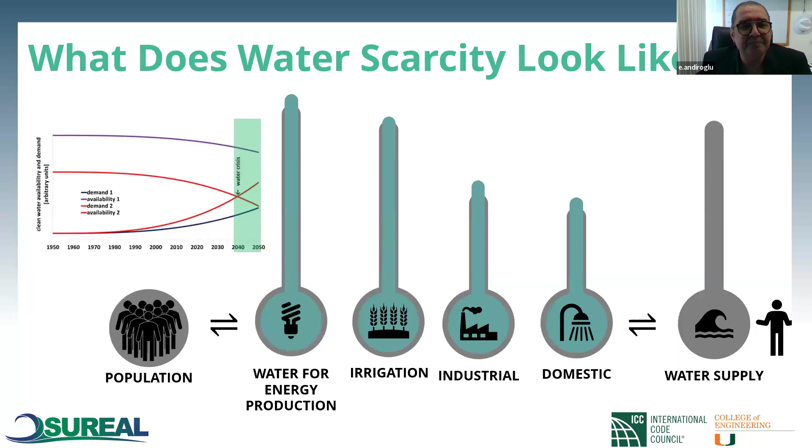It's also important to highlight that water is a resource we often take for granted, but a very small percentage of total water on Earth is actually readily accessible and usable by us. The three primary categories - agricultural at 70%, industrial at 22%, and residential premise plumbing systems at around 8% - make up most of that demand. But all of that comes out of about 2.5% of total water on Earth that is fresh water. The remaining 97.5% is salt water.

Out of that 2.5%, the bulk is really embodied within frozen icebergs. So the readily available water for us on the surface is right around 0.3 to 0.5% of the total available water supply. Readily accessible meaning, yes, we have earth layers and water tables, but that requires energy and additional resources for direct access. So how well we manage and how efficiently we utilize water that is readily available is really significant. Let's move on to the next.

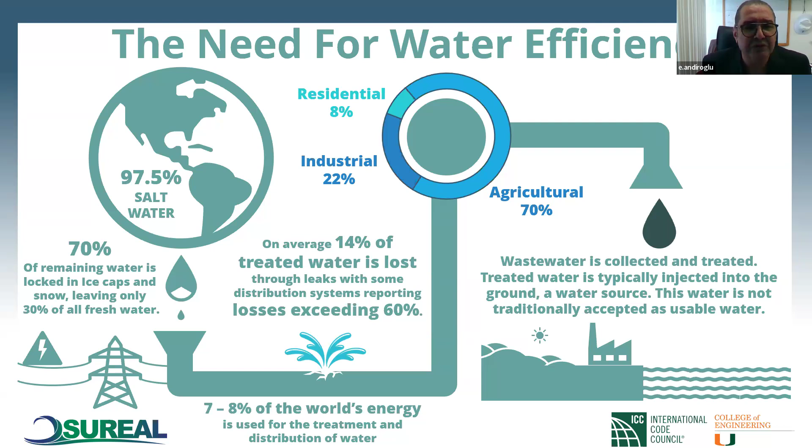With all that said, hopefully we all recognize that we must arrive at certain strategies that help reduce our water consumption and better utilize this precious resource. To better describe this intent, we can think of it as two categories.

On one side, end use reductions, where you can improve efficiency. You can bring on regulatory guidelines that help guide end users, and better education and awareness of this management need and practices. On the other side, water reuse - having access to that very small percentage of readily available water. How can we better manage that water? What are the reuse practices?

This speaks to three general categories. Starting from the bottom: protecting water resources from a water quality standpoint. The more protection we implement, the less environmental pollution we introduce, the more readily available these water resources become for reuse, because they reduce the treatment burden, which has significant cost implications. On-site wastewater treatment technologies and management standards, which you're going to hear a lot more about from my team in a little bit, are certainly key in helping that shape up.

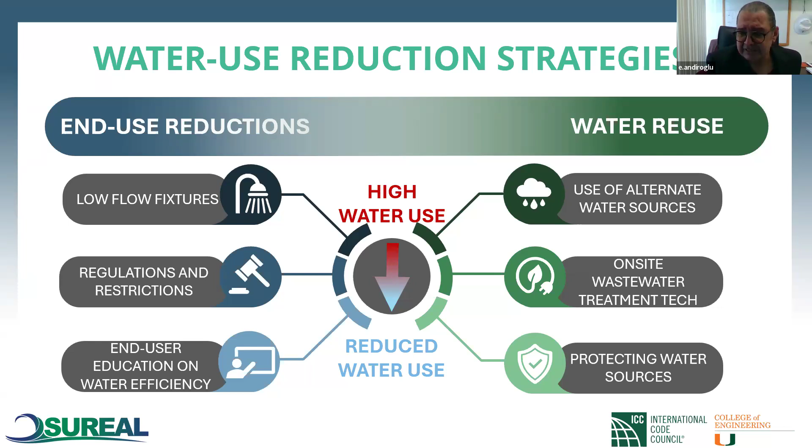So with that, I'm going to turn over the discussion to my team member, Kyrah Williams, who's going to exemplify some of the provisions that can be integrated to help operationalize or visualize the benefits and pathways that can come from these, whether it's end use reductions or water reuse practices. How can we operationalize them? So Kyrah, go ahead. Thank you, Professor Andiroglu.

So by understanding the various pathways, the mission to create a standardized approach that could be applicable to all cities was created by the International Code Council, the ICC, through development of the 2021 International Water Conservation Code provisions, which I'll continuously refer to as the IWCCP.

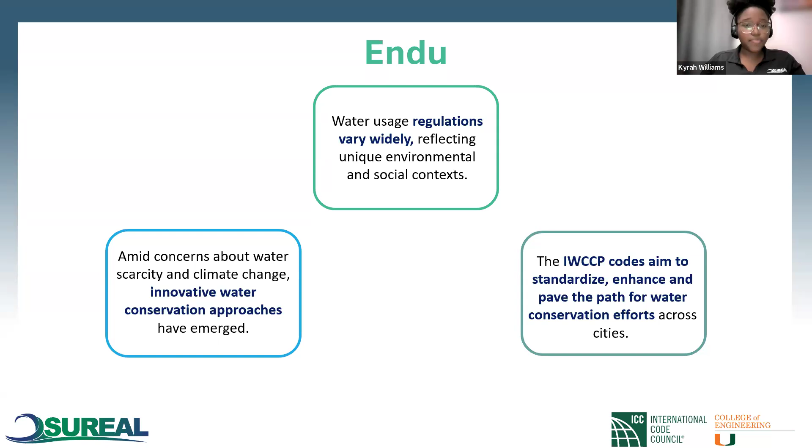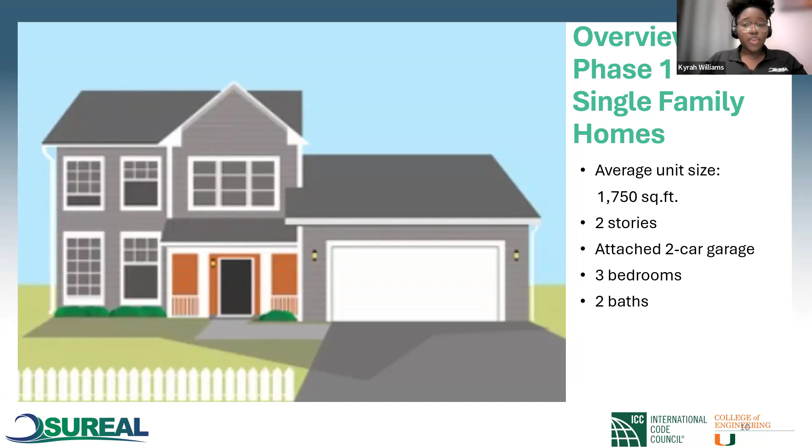In Phase 1, we decided to focus on single family homes. We obtained the average unit size, number of bedrooms, and average square feet. For Phase 2A, we focused on multifamily. Being that multifamily construction is very vast in nature, we broke it up into different building types: garden style low-rise, mid-rise, and high-rise properties, obtaining an average dwelling unit size of 875 square feet and what the typical bedroom and bathroom would look like.

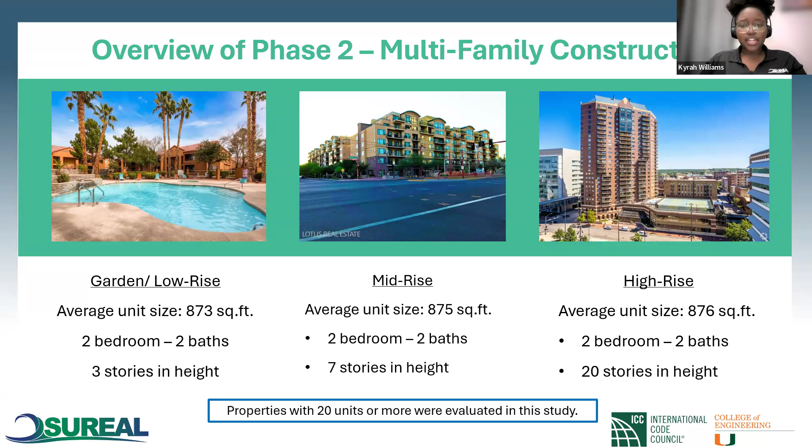Moving forward, in order to assess the outcomes of end-use reductions as well as water reuse, we decided to focus on the IWCCP's measures and how they could be implemented. The measures listed are: water efficient fixtures and appliances, gray water systems, rainwater harvesting, HVAC condensation recovery, hot water systems and piping, alternative water resources, plumbing system design, and landscape irrigation efficiency. But for our research, we decided to focus on the low-hanging fruit, which are the 4 circled in blue.

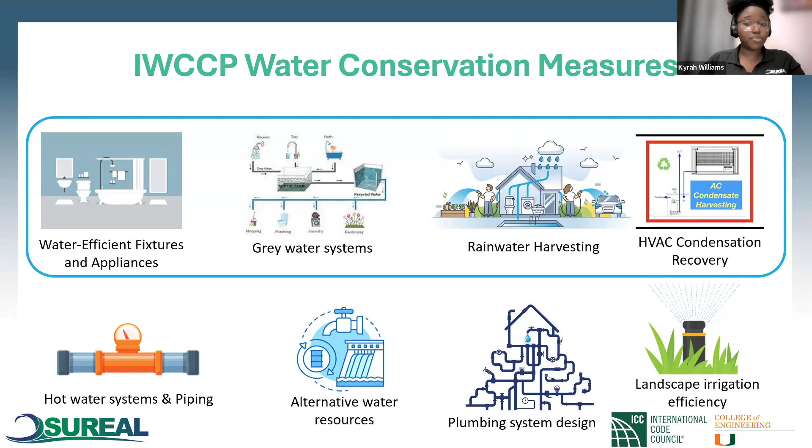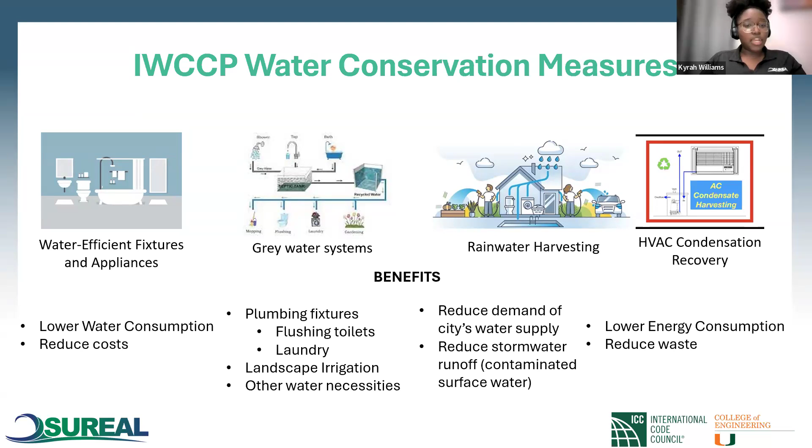As a result, we decided to focus on the benefits these 4 measures can give us, which is lower water consumption, but also lower energy consumption. We also looked at the multiple uses that can come from implementing these measures, such as for a consumer's everyday life like laundry, gardening, washing your car, but also from the city standpoint of reducing water demand and limiting stormwater runoff.

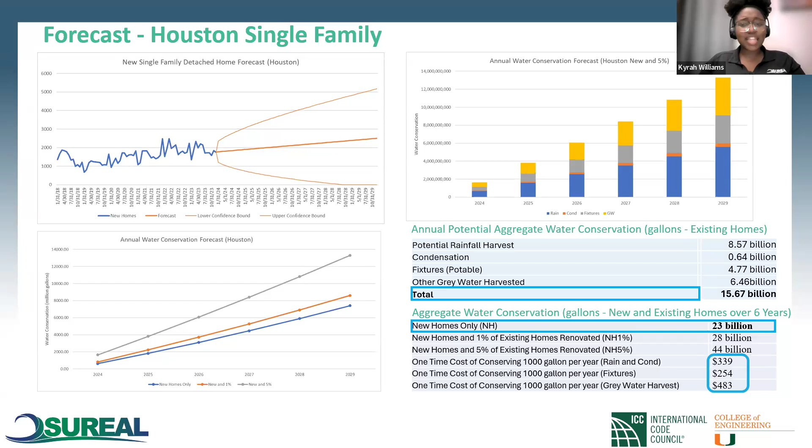So after applying the same framework, we also apply this to multifamily construction. If you can flip back to the first slide and back to this one again, you'll be able to see the comparison of data on the implementation of fixtures versus single family or multifamily. You can already see a difference just based on building typology. For instance, for a garden style home in Houston, for existing homes, 21.1 billion gallons can be conserved.

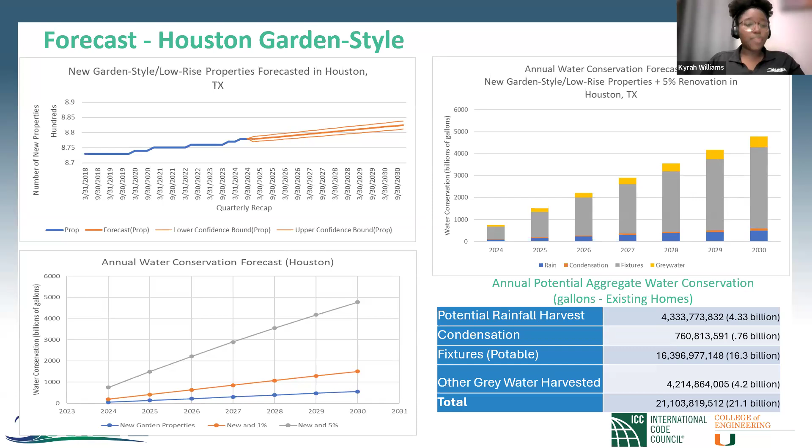Our overall takeaway was that there's not a one size fits all approach. It's actually very vast, where different measures cannot work for every building typology. So if we're looking at garden, mid-rise, and high-rise, you can see on the screen the range from 559 billion gallons to 14 billion gallons. Even though you may implement these measures, they may not all fit.

But for the city of Houston, 698 billion gallons are projected to be the approximate total potential aggregate for water conservation for multifamily construction. Next slide, please.

So comparing the data between phase 1 and phase 2, at the top you see new multifamily construction, and at the bottom you'll see new homes. Using your deductive reasoning, you're able to see that the implementation of water efficient fixtures is super paramount, regardless of the city.

Specifically, if we're looking at Las Vegas, for instance, it definitely helps and aids in conserving water. Versus if you're looking at Des Moines or Houston, when you're looking at rainwater, it is not the same. When you're looking at multifamily construction, it may not be of a big benefit, but it does help compared to single family, where it's a tremendous benefit that is actually very helpful and something you should implement. Whereas if you look at Phoenix, which is the last column, rainwater may not be of major assistance, and there may need to be more focus on implementation of water efficient fixtures and gray water harvesting.

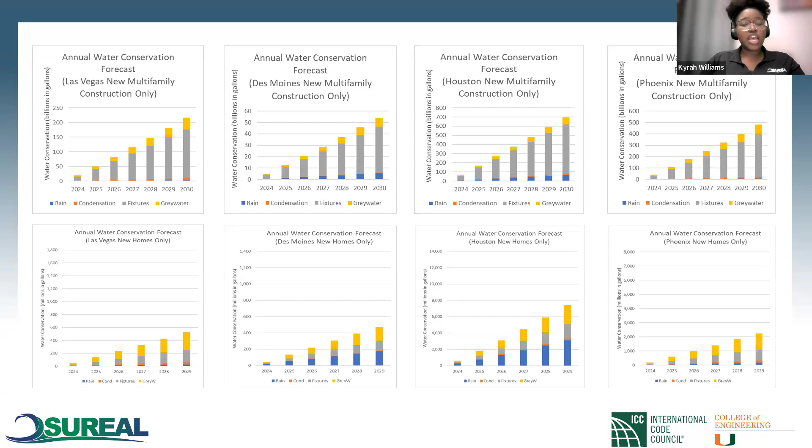Next slide, please. So to do a quick deep dive into the analysis of potable versus non-potable water, the graph on the left shows how much water is consumed in blue, and in green, the implementation of water efficient fixtures. As you can tell, even with the implementation of water efficient fixtures, that doesn't meet the potable demand.

However, if we look at the non-potable graph to the right, you have consumption in the bright teal, and then you have rainwater and gray water harvesting, which are respective to each other within the graphs. If you're using non-potable demand for rainwater and gray water for each of the cities, it may or may not actually meet the non-potable demand.

For instance, Houston, since that's what we're focusing on today, the implementation of rainwater harvesting and gray water harvesting can meet the non-potable demand. And if you were to use the rainwater, gray water, and water efficient fixtures together in order to meet the total water consumption, it will meet the total demand.

Whereas if you're looking at Las Vegas, rainwater and gray water harvesting may not meet the full non-potable demand, but with the help of water efficient fixtures, it'll be able to meet the total water consumption needs for that specific city. So with that being said, if we were to combine these measures, ultimately the goal is to find out where the synergy is and where there's a certain level of combination of approach to water conservation that can ultimately be beneficial for all.

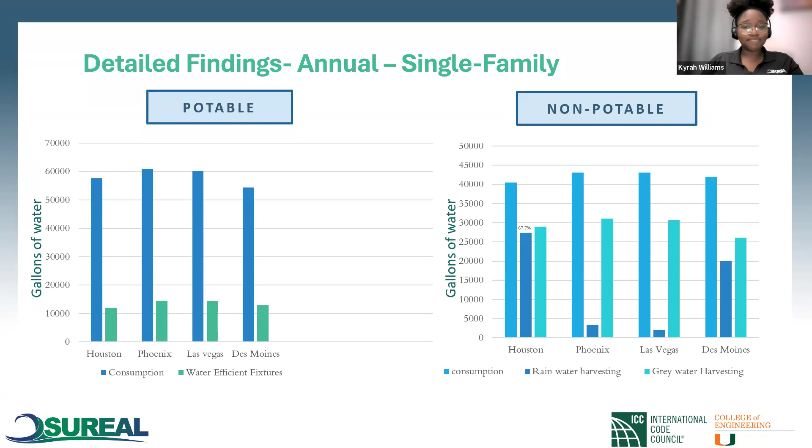And yeah, so what Kyrah was talking about earlier is really great, right? It talks about what could be, right? And that's very important. But in order to get there, we've got a long way to go. And that's kind of where the research that we're doing comes in with the SUREAL Laboratory. So I want you guys to take a moment and look at this graph right here.

So we're looking at the overall water supply, essentially called withdrawals by use category. If you look closely at the bottom graph, you'll see a little purple bar. My research primarily focuses on that purple bar, which is public supply.

That means every day we use water for showering, consuming, cooking, irrigation. But notice that with the introduction of water efficient practices, such as the EPA Act, which is intended to reduce water consumption in residential buildings, we've noticed this purple bar, which used to be growing at a linear rate, has started to slow in growth or stop.

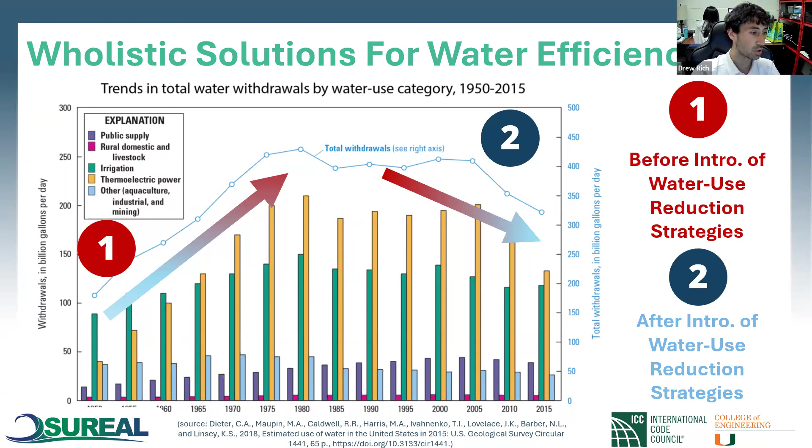So why does that matter? When we look at this, we have to consider premise plumbing systems. These are our buildings, the portion of the building that delivers potable water to the end user. Whenever we take a shower, our potable water systems are supplying that water. Whenever you cook pasta, whatever you want to do in your home, we have a supply system delivering that water.

Now how does this connect to water efficient practices? Why is this a challenge? What does this even mean? Well, when we design our systems, we design them in a tree-like manner. And if we suddenly reduce the amount of water in the system, but don't change the overall design, like the sizing of these systems, we have an issue.

We have something leading to what's called stagnation, where the water in the pipe stays there for long periods of time. I'll talk about it a little bit, but in order to understand this, we're going to talk about supply system design.

First, they are formed in a tree-like structure. In A, we have that tree-like structure, a distribution system. We have one main distribution line that feeds all of the rest of the apartments or units or single-family homes. For example in point B, we distribute water from the main supply, and then subsequent points distribute that water to the units or single-family homes.

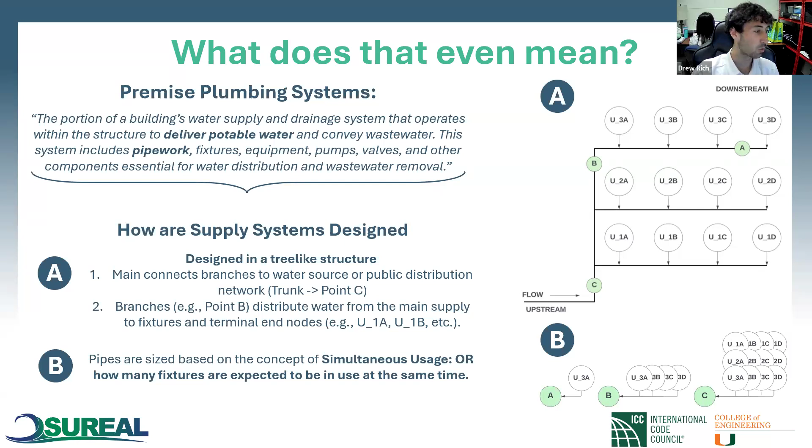Now when we get into that, we run into some problems. When designing a system, we know there's a range of flows that the pipe can experience. For example, not all of your fixtures are on at the same time throughout the day. So we have to select an appropriate design flow rate. There's likely ranges that the pipe can access.

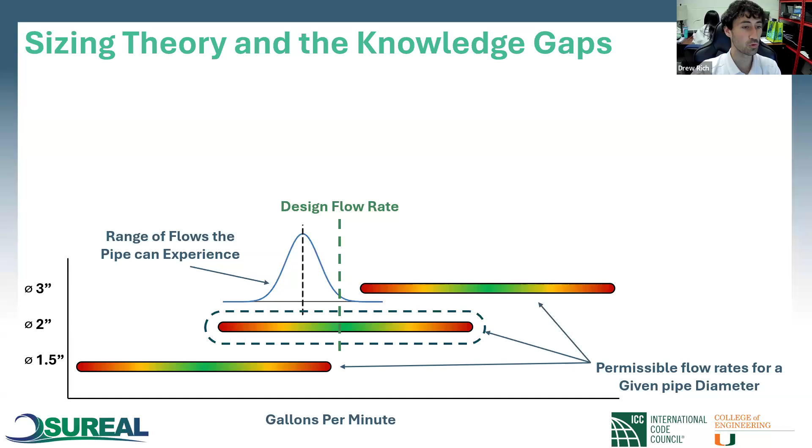For example, for a pipe that has all of the fixtures like a shower, a water closet, a lavatory, there's an expected amount of flow going through that, and we have to size to that design. So what happens if we end up undersizing, or pick a design flow rate that's much less than we expect it to be? Well, we have some significant issues.

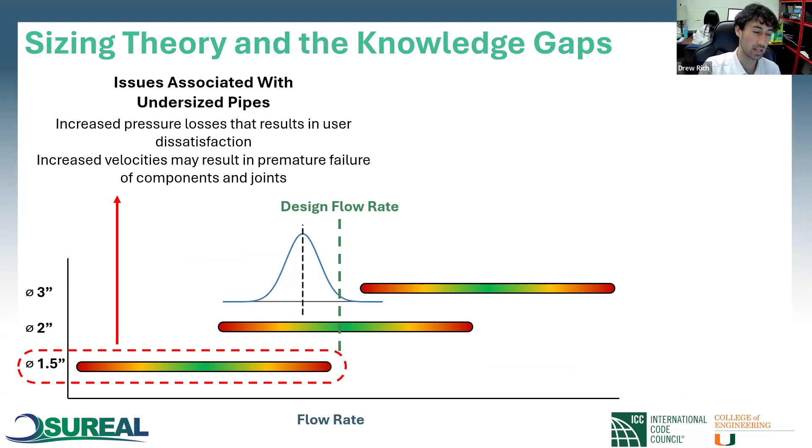First of all, we have increased pressure losses that result in user dissatisfaction. We have increased velocities that may result in premature failure of components. So we don't want to undersize it because that would lead to some pretty bad things. But what happens on the other side? What happens if we oversize these systems?

Well, we start to see that there's an increased capital cost, right? If you're using a 3-inch pipe versus a 2-inch pipe, that costs more. We see health risks from opportunistic pathogens, things like Legionella. So if the water is sitting in that pipe too long, it can develop a lot of pathogens that can actually negatively impact the end user.

We have inefficient energy use from pumps. So if we expect to pump 100 gallons of water and we're only pumping 20, we've now picked a pump that's way too big for the distribution system. And then we also have excess water stored, which is increasing the amount of water that you have to treat and maintain, which also increases cost.

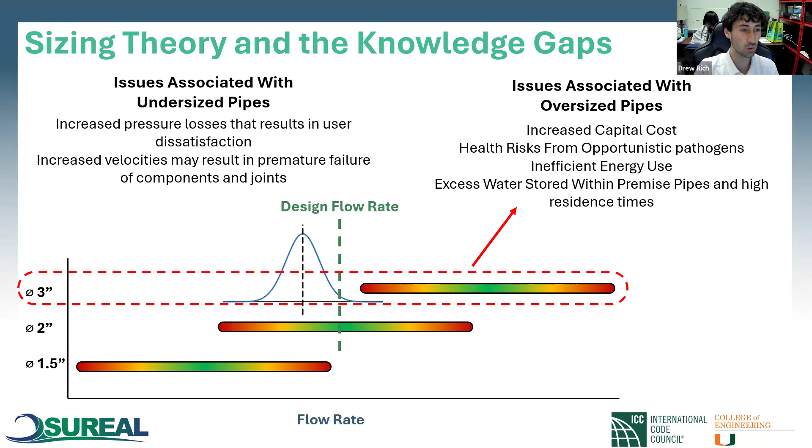So it's very important to select that kind of middle ground and get the design flow rate for these systems correct. So that's the why.

What is the gap? We see since the 1980s that there's been significant reductions in the way we use water. The only problem is we haven't changed the design framework. So Kyra talked a lot about efficient water use practices. That's great, that's fantastic. But what's happened is we haven't changed the way we size our systems.

So we have significantly oversized pipes, sometimes even 100% oversized. This can lead to some of the problems that I was discussing in the previous slide, and we really, really want to avoid that.

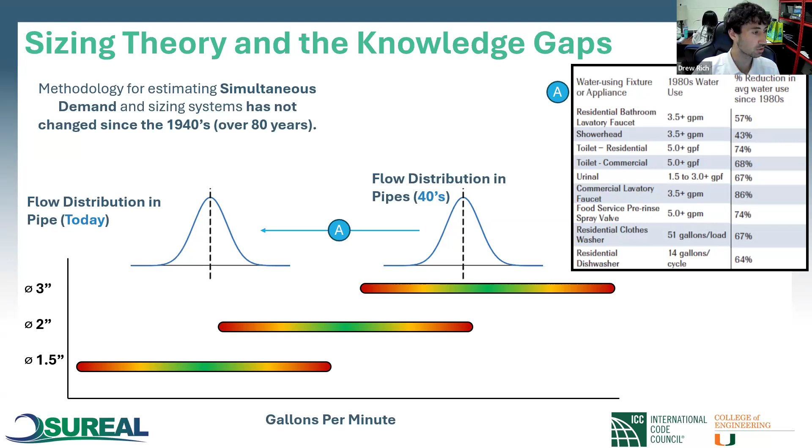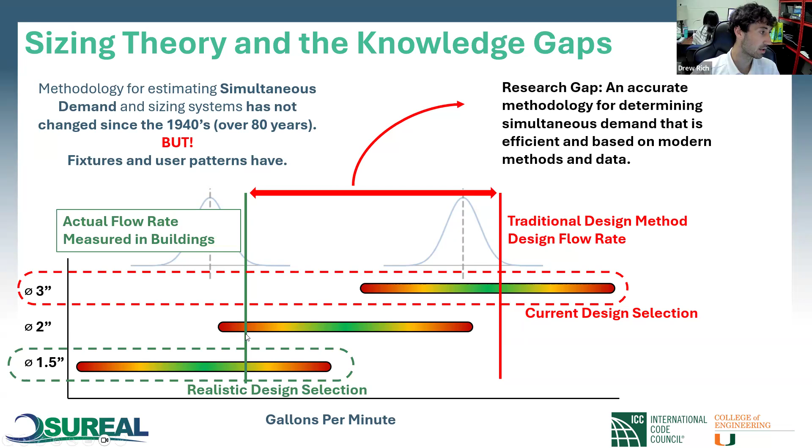So what are the solutions? Right now, there's a major research gap. This is the problem. This is a little bit of a complex slide, but what we're seeing is that there's a gap in the research. We need to be able to accurately understand or create a methodology that can predict the appropriate amount of water flowing through a pipe so that we can then size the pipes appropriately and avoid all of these negative consequences. So we see here where the red line is pointed up, and you can see it right here, that we have the current design selection where the actual flow rate is significantly decreased. So we're trying to avoid that.

So what is our solution? We want to make something that first is resilient. So we wanted a global product. We wanted to make this a living document so that we didn't end up in a situation where we needed to do this exact same process in 10, 20, 30 years.

As Kyra said, we're always implementing new strategies to try and save water. If we create a system that's not updatable, we're going to end up in a situation where we have to go back and do this process all again. On top of that, we wanted a simplified design approach. Engineers are ultimately going to be the people using these systems, so we need to make sure this is simple enough and efficient that they can use it without getting turned off from it being too complicated.

In terms of public health and safety, we want to make sure that this is meeting the needs of the building environment, making sure we're not having any pathogens in our system. So really making sure we accurately size those pipes.

And then we want to make sure that this system is modular and adjustable. Like Kyra had said, based on different cities, there's different requirements for water saving practices—some places are more water efficient than others. So we want to make sure that this product or idea is modular and adjustable, that it can adapt to the location of where we're trying to design the system. And in essence, that is the goal of the ICC 815 committee, who's tasked with developing this standard.

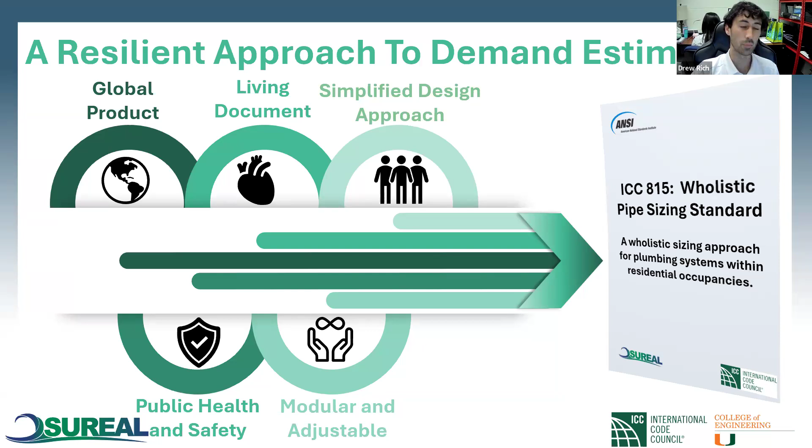Now, what we've ended up developing is a new pipe sizing approach through our research that allows for all of this to occur. We've developed a pipe sizing system that uses a network, or a series of lines and nodes, that can automatically provide a simple design approach for the entire building.

Now, what does that mean? Why is this important? Because again, all these fancy graphs, these fancy distributions, they're great, but what is the actual benefit of having these? So if we look down below, we can start to see that this provides a simple design approach—very simple, very easy to use.

This is a self-improving algorithm. It allows us to automatically update as soon as we get new information and data about water consumption patterns. This adapts to communities around the world. If we take data from the US, we can make a system for the US. If we take data from the UK, we can make a system for the UK. We can do this as long as we have the appropriate data dictating how water is used.

On top of this, it saves a lot—it saves time, it saves money, it saves materials, it saves energy. It allows us to more accurately design our systems and reduce waste that we really don't need to have. So when we look at these efficient practices, we want to make sure we make solutions that can adapt to the changes we're making to combat water scarcity. So from an efficiency standpoint, that's one of the solutions we produced.

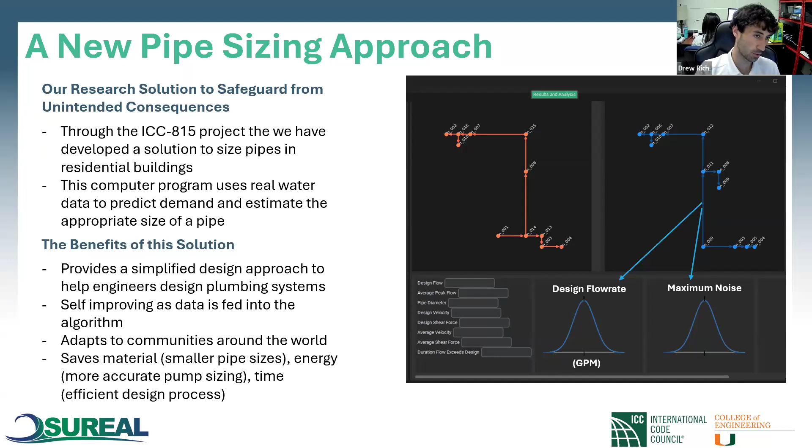Moving on to the next, water reuse—I briefly want to go over it. I know Kyra kind of covered it, but I think it's important to retouch on this. So what is water reuse and what are some of the streams? As Kyra mentioned earlier, we have streams called black water reuse, industrial reuse, rainwater and atmospheric condensate, gray water—and each one of these has a different water quality.

So when we talk about reuse, this can be a challenge. We can't treat gray water—water from sinks, dishwash, laundry, showers—the same as we treat our toilet water. It doesn't make sense. Those are very different types of water, so they require different water treatment levels, and that's a challenge.

That's one of the things standing in the way of implementing something like Kyra's suggestion. On top of that, there's a lot of different uses. We don't necessarily need to treat the water we're irrigating with to the same level we need to treat the water we're drinking.

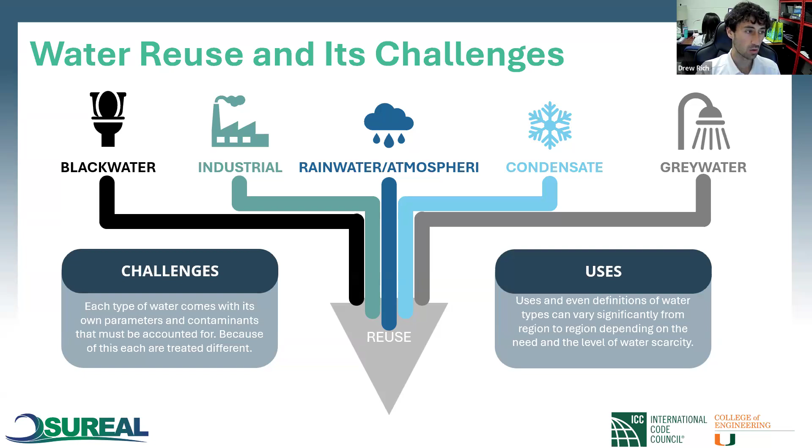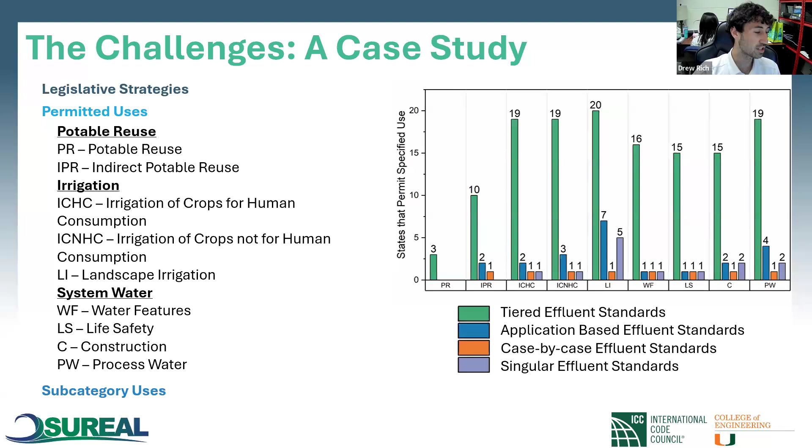Let's go even further. Inside each of these categories, like the ICHC, we have even more categories. We have things like, when we're talking about irrigation, athletic fields, cemeteries, college and university campuses, commercial campuses, golf courses. All of these have different standards for acceptable treatment levels.

So it makes it very, very challenging to actually implement these water reuse strategies like Kyra's talking about. And that's the key takeaway I want you to take from these slides—it makes it almost a barrier for implementation of these strategies.

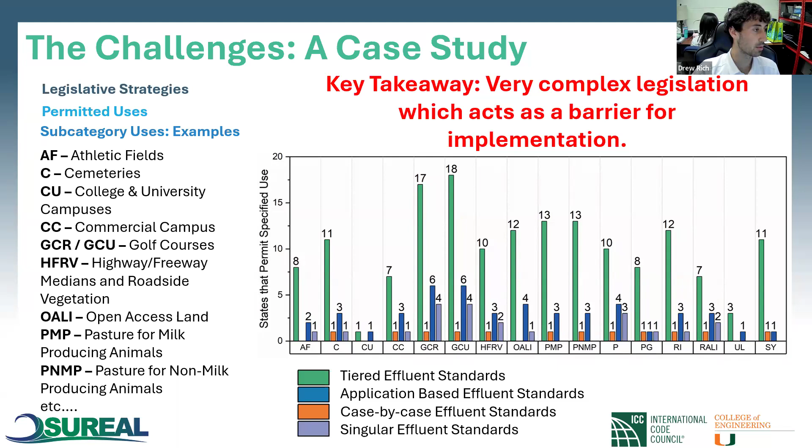So through our research, what we've been able to do is work with ICC to develop a new version of what we call the IPC Chapter 13, or IPC 1301 and 1302, responding to that challenge. Working with ICC in a very large, great working group—it was a pleasure working with them, it was awesome.

And then allow for authorities having jurisdiction to be really able to enforce these and say, okay, that makes sense, this is permitted. So we're taking that first step in allowing water reuse practices to truly be implemented.

Now, the next step we have to consider, and Austin, my colleague, is going to be talking about, is what has to happen in terms of the wastewater side, and what are the different types of wastewater systems that can actually allow these to be implemented. So from there, I'll hand it over to Austin Perry.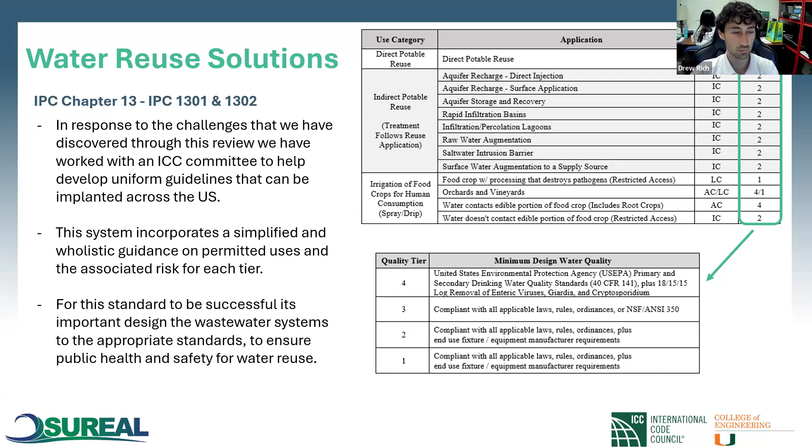I'm Austin. I'll be talking today about some of the core challenges as far as residential wastewater management relates to water reuse, some water scarcity resilience, and we'll just go through kind of a global perspective on what's all going on out there.

Where can we make some inroads to facilitate more water reuse, and where we might find some challenges and some obstacles to implementation and adoption across the world.

So first things first, some of the core challenges in residential wastewater management. The first one is community-centered sanitation solutions. So what I mean by this is we've got to focus on solutions that are locally appropriate and driven by the community needs.

One of the things we run into quite consistently are manufacturers or producers of these types of systems who might say, you know, every year we go and do some philanthropic work wherever on planet Earth where they may not have sanitation systems.

And we take our systems that we make and develop and bring it over there and give it to them. And then we expect them to use it indefinitely. And we're going to take them from potentially open defecation or some low-level pit latrine type system to some advanced water management type system.

And they ask us, what is your perspective on that? Do you think, you know, we've left this project a year ago, in our minds it's still working and it's working great. What do you think?

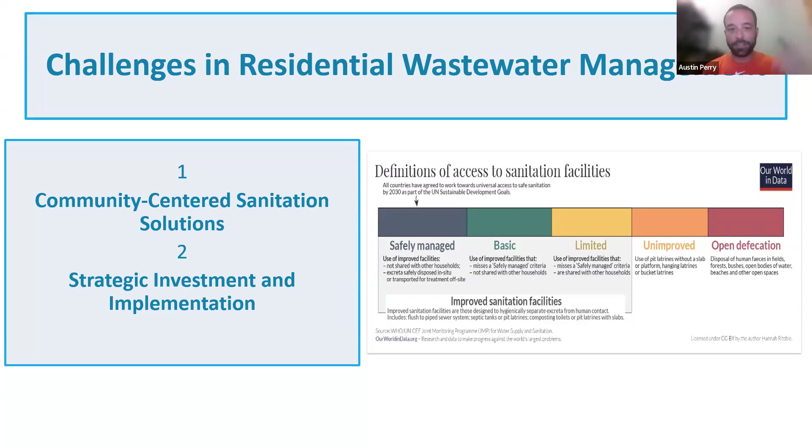So we view the standards, the building codes, as far as on-site wastewater treatment, as that guiding light. It may not be completely applicable to everybody right now, but if we set it up in such a way that people understand where they are, where they're trying to go, and all of the milestones and checkpoints along the way, we can set them off on their own pace. And eventually, over a long enough period of time, they'll ultimately get to their end goal, which is whatever specifically they might need. Next slide, please.

And then we have the last one: international objectives and priorities. I'll just quickly touch on that. Essentially, going back to saying, the international community might have its one set of goals. We want to turn our wastewater into potable drinking water. That is the dream that everyone is kind of working towards.

However, what you'll find is there are many communities on planet Earth that do not want that. They just culturally or socially understand that it's wastewater. They understand that it's icky. They understand that there's some sort of health impact associated with it, and they understand that you can treat it, you can treat it to potable reuse. You put it under a microscope and everything's clean, but still they know what it was at one point. And because they know that, they're put off by the idea of drinking it later.

There are some hoops you have to jump through. There are some considerations you have to acknowledge and address, and then maybe they'll consider it. But if you're simply going to every community on planet Earth and saying we're doing potable water or wastewater reuse, you're going to see some pushback in some areas. So it's an interesting kind of obstacle to overcome.

So we have our international priorities, potable water reuse, and we have those local priorities, those local needs, which say, hey, that's great, but that's not for us, we need something a little bit different, and we'll be two thumbs up about it. So on this slide, what we want to do is empower communities for those global health improvements. Since we're talking about wastewater, we know that this is a public health challenge. If we're able to satisfy the sanitation and public health challenges associated with sanitation, a lot of indirect benefits are seen. This is everything from workforce participation to education participation, et cetera. So we have a complex challenge of wastewater and sanitation.

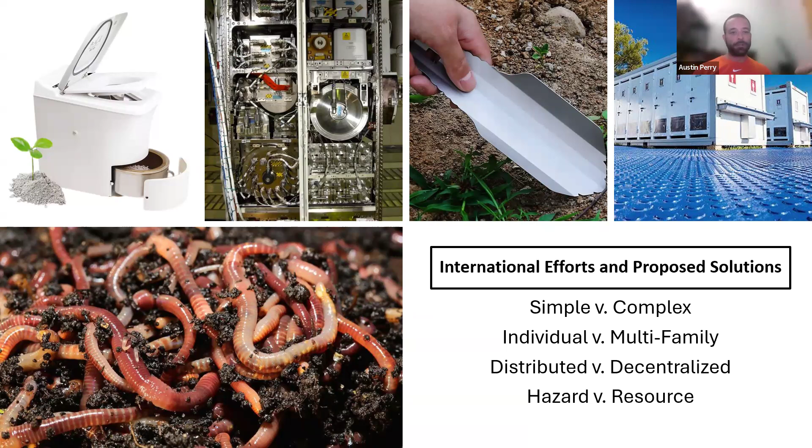And you're probably right, you're probably with the vast majority of planet Earth that cannot afford this. The International Space Station is the most expensive machine ever built, so this is one of those very specific items built for such a specific task. So our international efforts and proposed solutions range from simple to complex, from something an individual can do, like that center right, this is what you call a cat hole, like if you're a backpacker.

To multifamily, where maybe several households live in a high density area and don't have enough land space to have a septic system individually. So they pool their resources to find something that's affordable for them, that's useful for them, and that can fit within their constraints.

And then distribute and decentralize—this is often used interchangeably. However, there's some effort to say, hey, one of them is a decentralized system where you are in control of all of the maintenance and operations, versus a distributed system, where you've hired a contractor to come and manage this for you.

And what we want to do is move away from wastewater as a hazard and push it as fast as we can to a resource. We want to make sure that nothing goes to waste, and that whatever we put in our wastewater is something we can use as an input for literally anything else. Anything we can use it for would be a win.

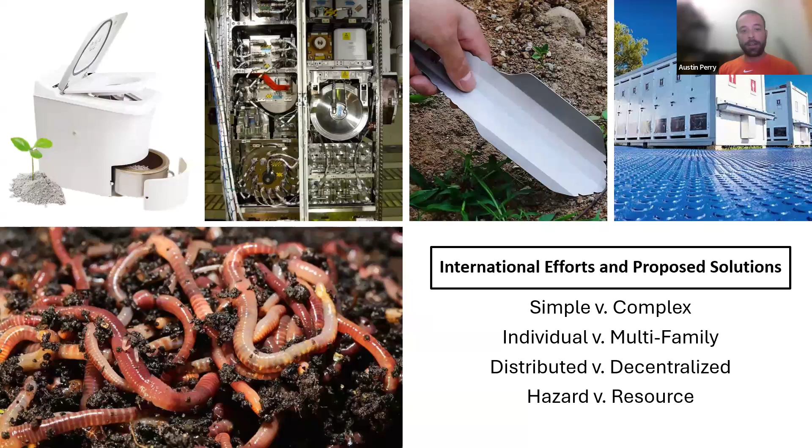All right, so very quickly, some of those resource constraints and adoption barriers—we can technically pull this off, but there are some resource constraints, and that's your capital in all forms. That's, do they need to be educated on this system? Do they have the proper governance? Do they know what needs to be enforced?

Do they know what somebody is looking for to confirm that this is potable water reuse? Do you have those standards involved? And then, do you have the workforce? If something comes up, are you the workforce, or do we have to hire the workforce? Does it have to be a professional or skilled workforce? Can it be my Uncle Joey?

We have to have all these types of answers, because the types of systems we need to select are based on what our capacity is. And if we don't have the capacity for it and we select that system, it's not going to last—it's probably going to fail very quickly.

So from one perspective, maybe we're not trying to hit home runs. We're not trying to provide the most advanced wastewater treatment system solution to all of planet Earth. Maybe we're just trying to put people on a path where they can make incremental improvements over a long enough period of time to get where they need to be going. Drew, next slide, please.

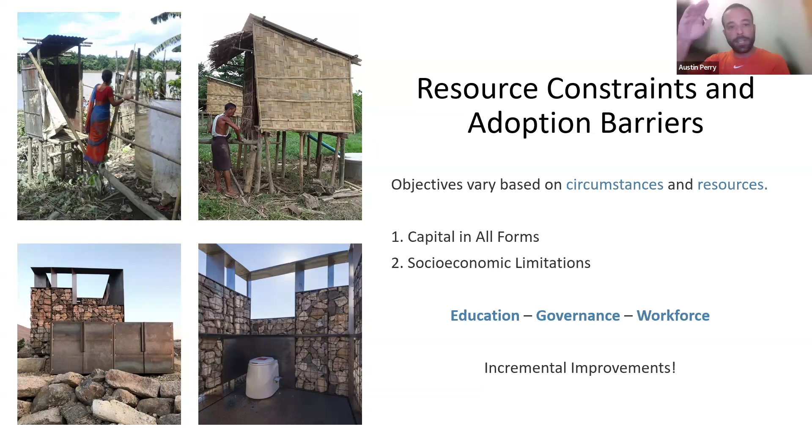And then, of course, you have to consider your local environment. If you want to create a potable water reuse system and rely on septic systems, okay, that's perfect. Maybe you don't want to do that here in Miami, where the water tables are rising and septics are inefficient. Maybe that's not the pathway you want to go down.

So all of these types of environmental hazards contribute to certain constraints that factor into what types of wastewater systems you want to select. And with those environmental considerations in mind, maybe those determine whether or not you can have potable water reuse versus water for irrigation versus water for industry, or whatever it might be. Drew, next slide.

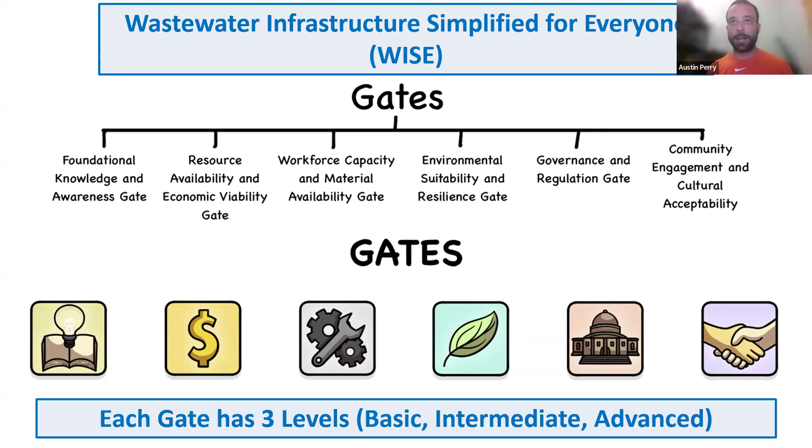Not only is it not great, it's actually an obstacle to the rest of the community. So when you look at what are those social constraints, these are the six that you're going to want to look for and satisfy.

And awareness: what is the system, how does it work, how can I ruin this, and how can I avoid ruining this? All of that knowledge needs to be there. Or the first chance they get, they're putting something in a toilet that shouldn't be there, and then the entire system is destroyed.

The regulatory compliance, and this is what we're working with the ICC to kind of create, that pathway to say, this is where you are. Here are the standards that you need to create a good wastewater system. Here are all the other steps that you can take, and here are all the standards and building codes associated with that to achieve the things that you want to achieve. And then innovative solutions.

We need to figure out, innovative solutions might work here, but what are the innovative solutions going to do someplace else on planet Earth? Are they still workable, or are they just going to fail outright because they're lacking some of that capacity within those gates? So these are all the things that I've been looking at and working on to try and say, once we have our standards and building codes for that water reuse, how do we translate that from a piece of paper onto deployment across planet Earth?

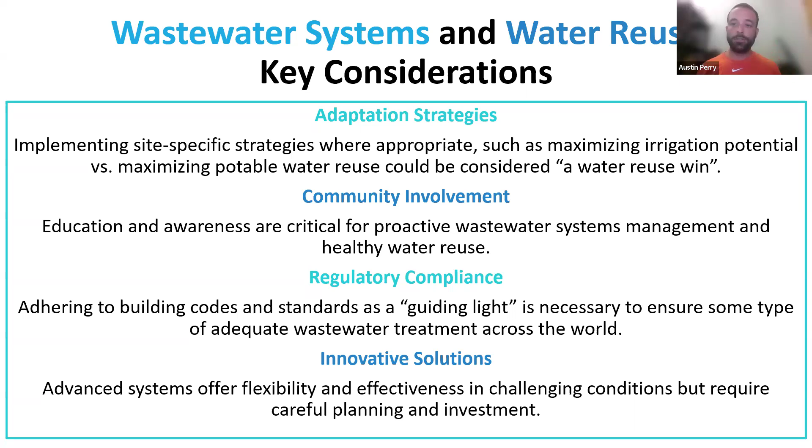Well, thank you very much, Austin, Kyra, and Drew, for summing all this up for us. And hopefully, in a short hour duration, we were able to highlight the relevance and significance of water scarcity challenges and safe management of water reuse, water resources, so that we are able to sustain healthy lifestyles not only for today, but for generations to come, years from now, here on Earth.

So again, we hope that you are able to take away some of the key points that we emphasize. Again, summarizing it quickly: water efficiency, various conservation provisions and practices, the path forward for battling water scarcity through efficient management and proper integration and implementation of water reuse practices.